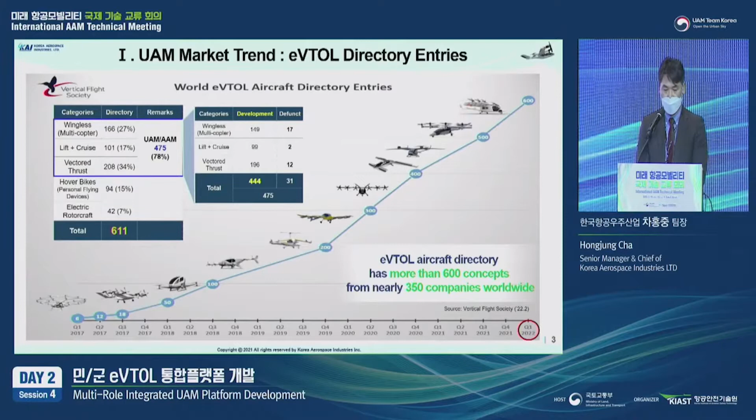Joby and Lilium, they have come up with tangible results with financing. So that's what makes others join the industry.

Let's move on to the status by type and region. There is development going on in 48 countries, mostly in Europe and in the US. I think that's because the aviation industry is much more advanced in these regions, and the startup ecosystem is more advanced as well. Mostly Germany and the US are leading the effort.

Let's take a look by type. In the earlier days, EHang and Volocopter were leading, but now they have been replaced by vector thrust lift cruise with multi-copters. Now around 34% are vector thrust.

Now, let me introduce some major players. I think most of you are interested in eVTOL and UAM, and these names must be very familiar to you. The data is from SM Consulting, a Korean consulting company. They take a look at the industry based on the number of aircrafts to see whether commercial level services are really available.

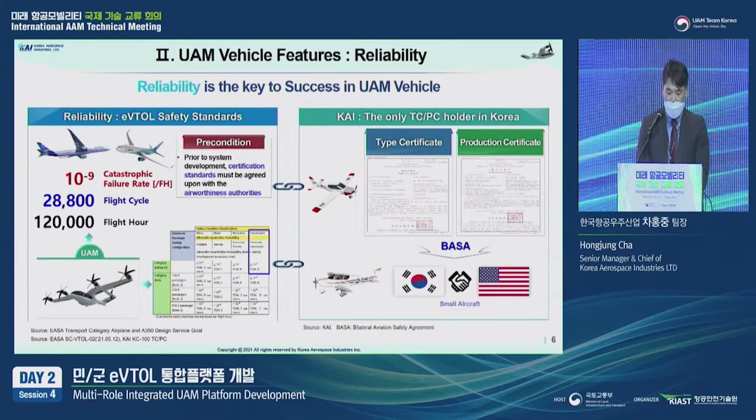There will be a type certificate or production certificate. This may sound like bragging, but until 2013 we developed the KC-100, and we are the only entity with both a type certificate and production certificate. We also entered a bilateral aviation safety agreement with the U.S., even expanding into aircraft.

Then what is the meaning of UAM's position at our company? If you are interested in our company, you may already know. Large national projects like KUH, and civil projects where we participate as a sharing partner, are our key business areas.

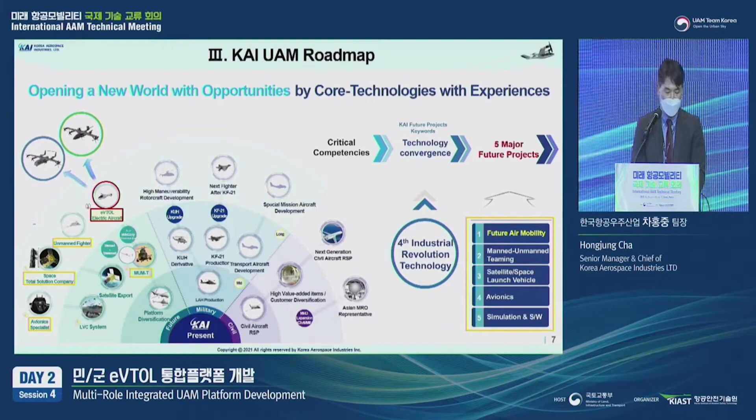We have 5 business areas where we want to further develop our capabilities. First is future air mobility, UAM, electric aircraft. The fourth industrial revolution is happening globally, and that trend has been reflected in our business strategy to choose AAM as one of the key future business areas.

Next is technology convergence. As you know, UAM should be able to take off or land vertically, and also provide unmanned autonomous flight. This is a combination of fixed wing and rotary wing aircraft. We have small helicopter aircraft and even a fighter jet that can fly at Mach speed.

We have around 2,000 professional engineers and a huge database. We are leveraging this to develop a new UAM, and we will focus our capabilities on it. These two aircraft, one is manned and the other is unmanned. This is the model we unveiled at the ADEX earlier.

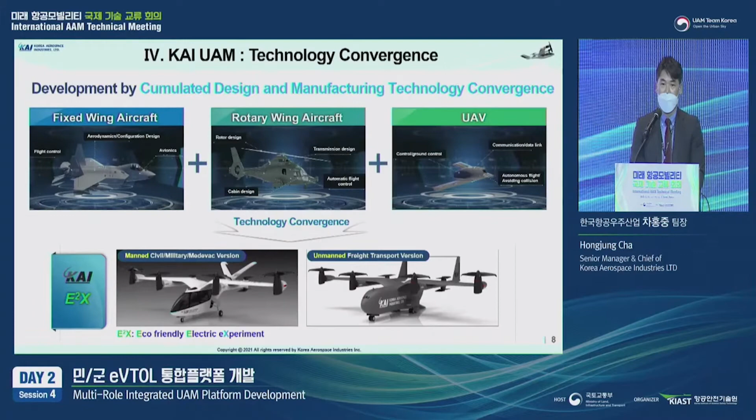In aircraft, we usually add the letter X for experimental vehicle. We named this vehicle E square X, an abbreviation of eco-friendly electric experiment. This is what we considered when we designed this model.

We reflected customer needs and also analyzed market trends in the process. UAM required in this area should have at least 5 seats and should be able to fly at least 100 kilometers. For military purposes, an unmanned vehicle with a payload of 600 kilograms is needed.

To meet these needs, we considered two factors, so we set our operational goal and requirements. I don't have it here, but we have more than 10 concept sketches. We invited experts to select 4 designs eventually. We also considered the size of the rotors, performance of the aircraft, and controllability.

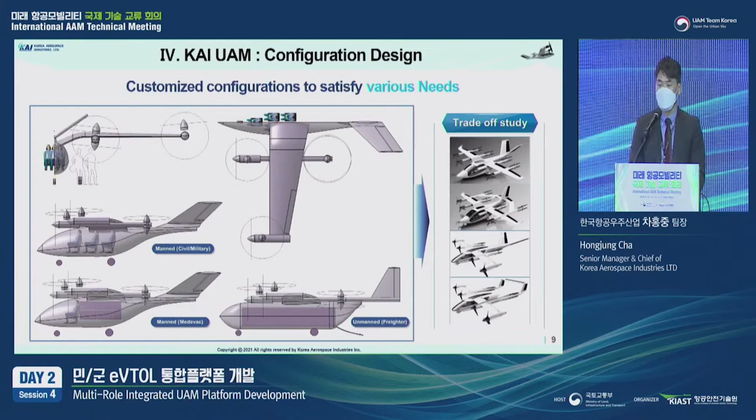To finalize two types of E square X, which were released at ADEX. The E square X's characteristics could be described as follows.

It is unique in commonality. To develop a model, you need at least around 30 billion won, and of course for the infrastructure for that model you will need more investment. So it's really burdensome for a company to develop 2 different aircraft.

So we wanted to identify the commonality in the powertrain and avionics parts. We decided to do this, which allowed us to shorten the mass production period and also save cost.

The aircraft has 4 tilt rotors on the front, and co-rotating rotors on the rear side. If you look, it has what's called gull wing - it looks like a gull wing.

It provides high stability. We think it's not like a fighter jet that requires maneuverability, since it's not the kind of aircraft UAM requires. Gull wing was selected to secure a wider view for the passengers.

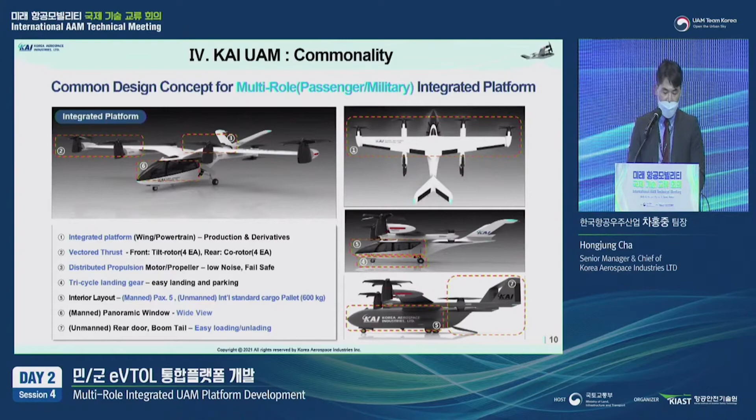For the landing gear, this was a part we deliberated on. The person in charge preferred the skid type. But what we actually considered was that it should be able to move freely and operate in an autonomous way at the parking apron after landing. That's not possible with a skid type, so considering taxiing as well, it's not proper. So we went for a tricycle landing gear instead, for easy landing and parking.

These are the specifications. It will be able to carry 5 passengers, with payload capacity, and a payload of 600 kilograms for cargo loading.

The maximum speed will be 250 kilometers per hour and the range is 100 kilometers. The range is shorter compared to other aircraft because of the battery, so it's somewhat limited.

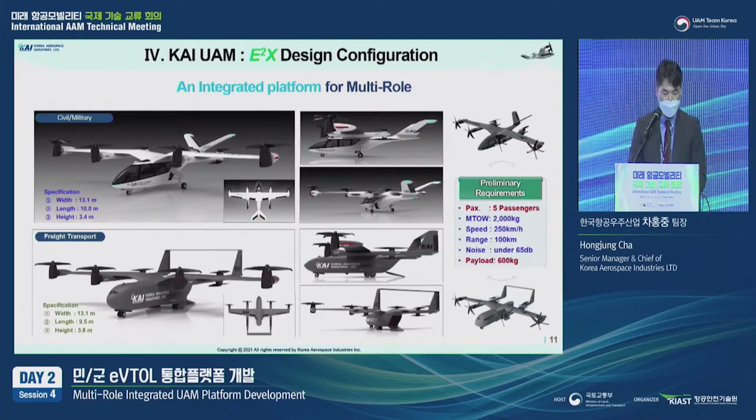To complement that, we started a project on a hybrid system. We are also starting another project on the propulsion system.

Yes, we can provide customized air vehicles according to the customer's needs. Vehicles that are produced overseas and certified in foreign countries cannot be easily certified in Korea.

Not just basic data, but also all the materials and data related to testing for certification will be utilized to develop the aircraft, which can result in four versions: civil or military aircraft that meet the customer's needs.

When it is used for military purposes, we can use it for command, utility, air assault, freight transport, and medical evacuation. If you want it bulletproof, we can add that.

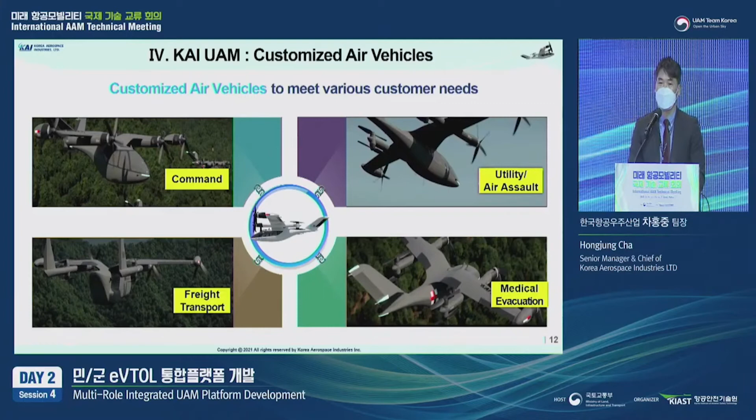If you need to fly it over a dangerous war zone, then we will be able to make it unmanned to fly it there.

Next is a video about our military concept demo, which was released at ADEX. So please watch it together.

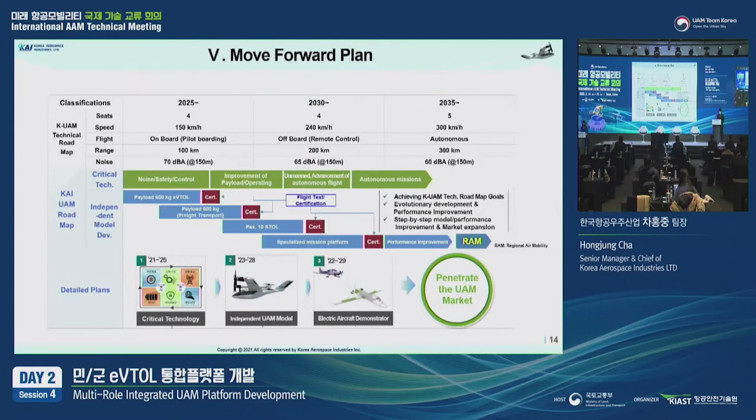Lastly, let me show you our future plan regarding UAM. Our first goal is to commercialize a multi-role UAM aircraft by 2028, and we are going to gradually increase the payload and increase the number of passengers up to 10.

We will, of course, develop the necessary core technologies by making investments in lightweight materials and many others. We also conducted another research project on hybrid systems.

We already started another project on the hydrogen propulsion system. Cost effectiveness and eco-friendliness are very important here, and we are also looking at thermoplastic materials.

After completing this technical phase, in 2029 we are going to expand our business into electrified aircraft. In this area, electrified UAM can all be combined together, and if we combine all the information and data we have in these areas, we will achieve quite good competitiveness in this sector.

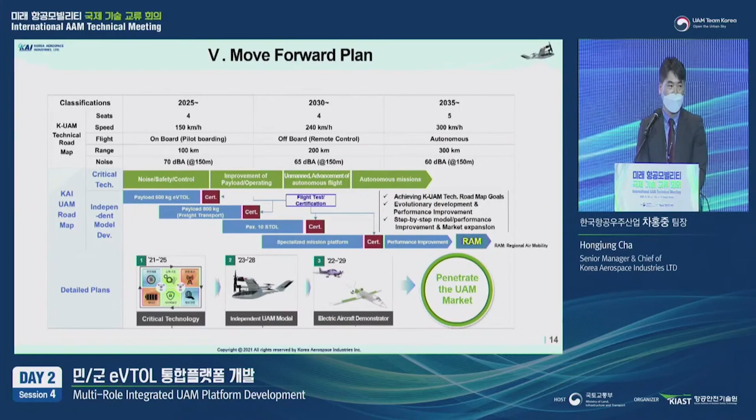That's all for our future UAM plan. Thank you very much for your attention.